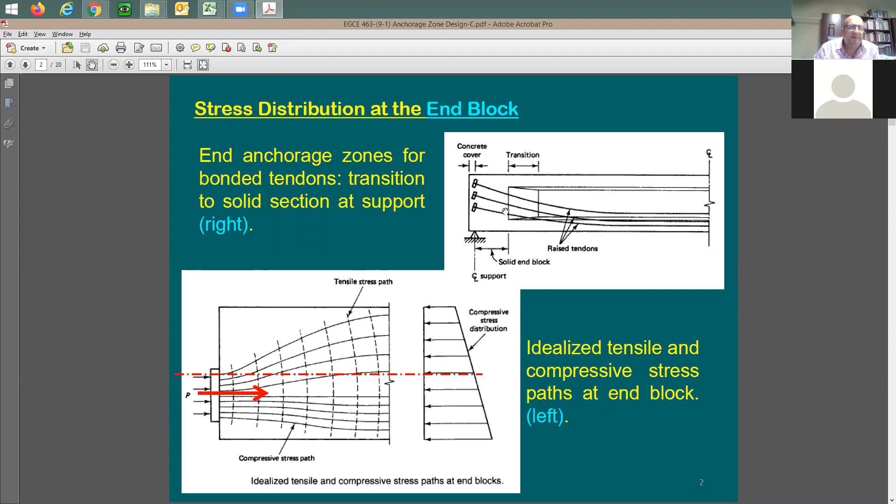Just speaking, here is a pre-stressed beam. It doesn't matter whether it's pre-tension or post-tension, but we have the cables, they're going to be draped, and at a certain point we're going to provide the anchorage right here. At this anchorage location, you're going to have some forces coming this way. So the force here is going to be compression on the concrete, while it's going to be tension on the strands themselves. The strands are exposed to tension, and this tension, once you put this anchor, is going to provide compression on the end block of the beam.

Now, this high compressive stress is going to cause some trouble here, because all of a sudden all the stresses are going to be at the end. This is where you transfer the force. Whether you have pre-tension or post-tension, transfer of the force is going to happen in this location, roughly in this area.

This is the reason you see this piece to be solid. See, this is solid here. And right here, if you cut the section, it's going to look like an I-beam. So here is going to look like an I section, and here's going to be a rectangular section. Why do we need this rectangular section? Because we have high compressive stresses at this place, and we need to provide some reinforcement to prevent cracks from happening at this location.

So if you look at what happens at just one bearing plate, you call this a bearing plate or the anchorage plate, you're going to put one big force. Most likely you'll have a few strands, but at the end we're going to put the resultant as one big force.

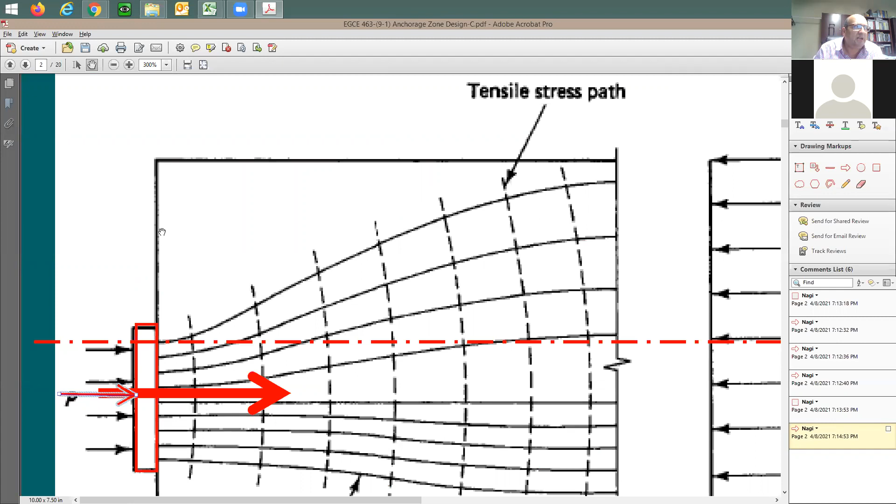Do you think you're going to have any stresses at this point? Any compressive stresses right at this point? Let me put it right here. If you put an axial force concentrated here only, actually in this area, you're not going to see any compression at all in this location.

This distribution is okay right here at this section if you put a big, rigid plate - a very stiff plate - and start to put the pressure. In this case, the stress distribution right below the plate is going to look like this. But if the force is concentrated at a certain location only, it's going to take some time before the stresses here get uniform, like in this shape. This is what we call the stress trajectories.

This shows how the stress is going to move from one point all the way to the end point. The stress is going to be uniform after a given section. Right here at this section, you see what happened to the compressive stresses - it's shown like solid lines. In this location, you have no axial compressive stresses at all. Same thing here, but after a certain distance, you're going to have this uniform distribution of stresses along the entire depth of the beam.

Meaning, if I'm going to be taking a section here, stress distribution is going to be only in this location. And here, no stresses at all, and here, no stresses. And you may have some tension in this location, you may have some tension in this location.

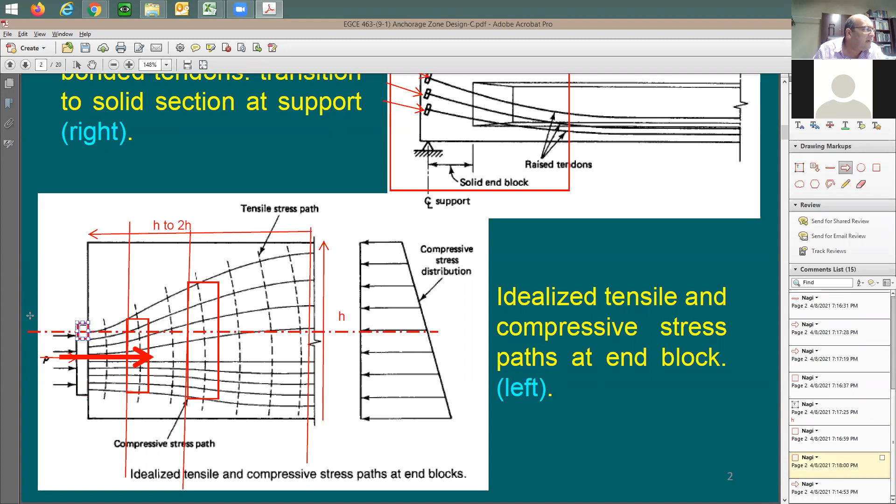But here, if I put, let's say, I'm going to divide this area into small areas, right? I'm going to make it like this. It's just going to be taking this little section. So I'm going to say I have one force applied here, as a resultant of this little segment that I have taken here.

So this force is coming here as compressive force. I'm going to say it's coming this way. It's going to be coming also this way, and like this, right, and then like this, as compression.

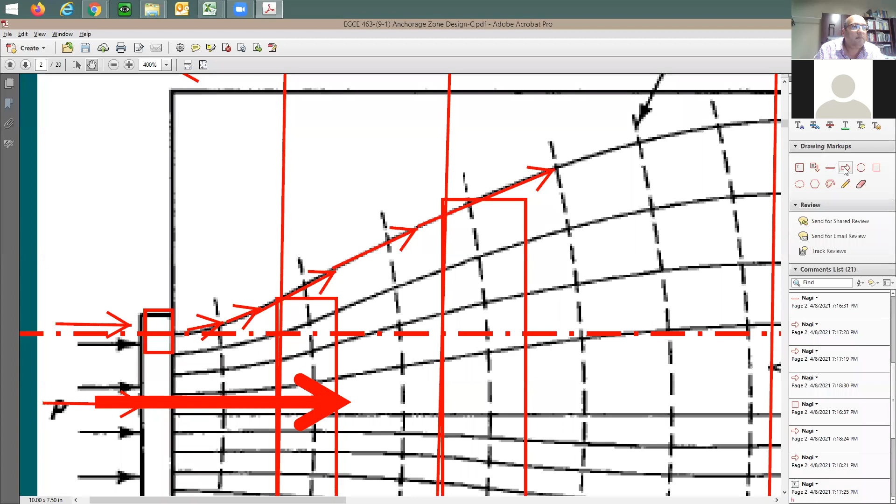At the end, a force is going to be coming that way, right, which is this compressive stresses. So if I give you these two forces here, I'm going to say if I have a component coming this way, another component is going to be completely horizontal.

Let's give you the consequence. What's going to happen in the vertical direction? Shouldn't you expect another force coming that way to balance this force? You say this force is pushing this way, and then you have this force resisting. So what's going to happen?

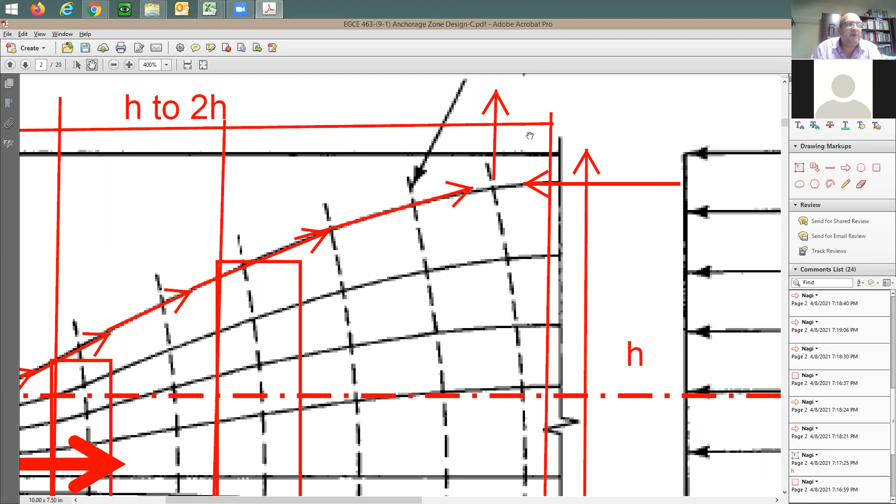There is a small component of this force that wants to go up, and this is going to be causing tension. So you should expect this tensile stresses throughout this dashed lines. So this dashed line here is going to represent tensile stresses.

Once the stress here becomes uniform as in compression in the x direction, you're good. You don't have any tensile stresses in the y direction. So this dashed line represents tensile stresses in the y direction. It's going to be like this, and on the bottom is going to be like this.

So here's the problem. Once you put some compressive force here, it wants to open up this block. Now, how would you resist it? What is the easiest way of resisting this?

You can say just add ties. So what I need to add is some ties in this direction here, right? This gives you like a tie, and here's another tie, like rebars. This gives you stirrups or ties, and this tie is going to be taking this tension force. But of course, you need to add some reinforcement here at the top and the bottom to anchor the ties through it.

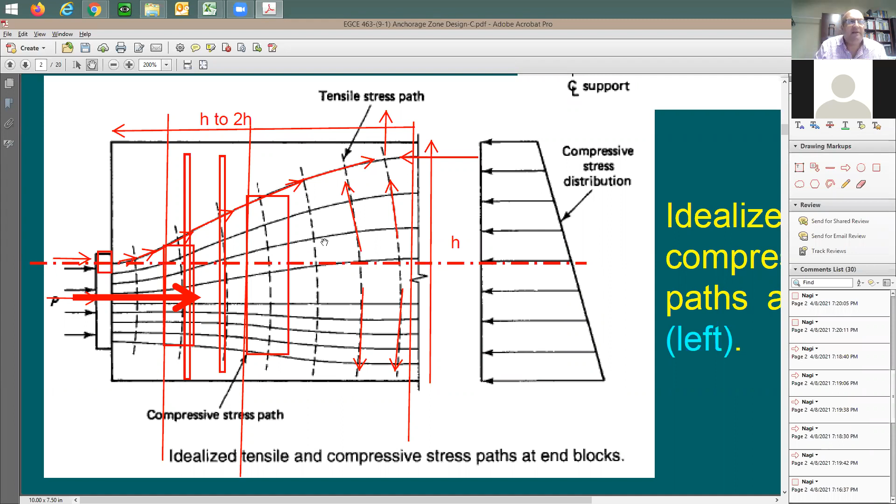It's going to be very similar to the shear design. We're going to provide some ties here to take this tension force. So this is kind of a general idea so that you guys know what we're talking about here, what's the importance of having this end block analysis, right? And as I said, we have two types of end blocks or anchor zones. We have one for the pre-tension, and another one for the post-tension.

Let's go through all of these notes to understand what's going on. It says here: concentration of compressive stresses occurs longitudinally at the supports of both pre-tension and post-tension. This is true, it happens in both cases. So whether you have pre-tension or post-tension, you're going to have some tensile stresses and some highly compressive stresses. It's going to get transferred from a local, smaller area to a bigger area, which means the entire beam depth.

For pre-tension beams, the stressing force gradually transfers to the surrounding concrete over a length of LT, your transfer length. Imagine this cable here is anchored, or bonded, to the concrete. Now, transfer of this pre-stressing force would need a certain length, and this length is called L sub T, transfer length. It is not necessarily equal to H or 2H, but we're going to see a way to determine this length. So over this distance, all the forces can get transferred from the strand to the concrete.

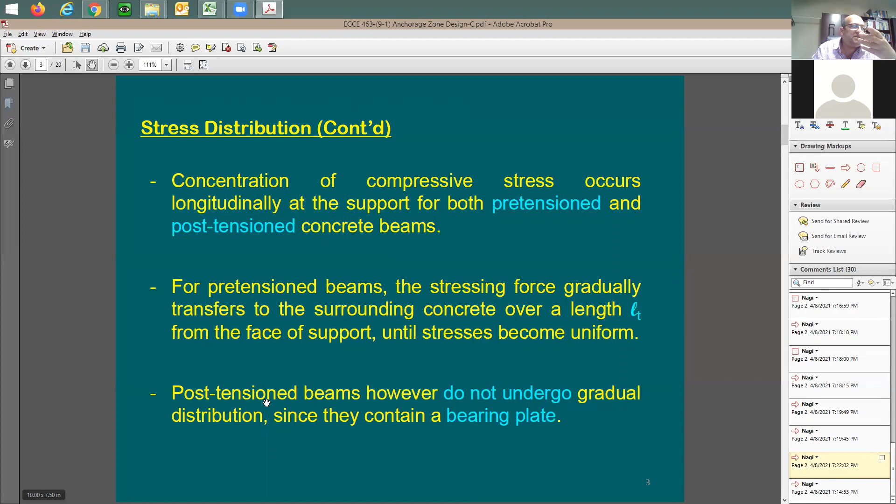But in post-tension, there is no bond in many cases between the strands and the concrete. The force is going to be like a point load applied at the end of this end block, just outside of it. This is a big difference between post-tension and pre-tension when it comes to end block design. So for pre-tension, you have the force transfer over L sub T, and in post-tension, you don't have this gradual distribution. Why? Because the entire plate is just loaded from outside.

So you don't have this transfer length. You have this transfer length when you have the pre-tension. But when you have the post-tension, this load is going to be applied from outside of the structure or beam, and the stress distribution is going to take a shape like this, but it's going to be all concentrated out of the beam itself.

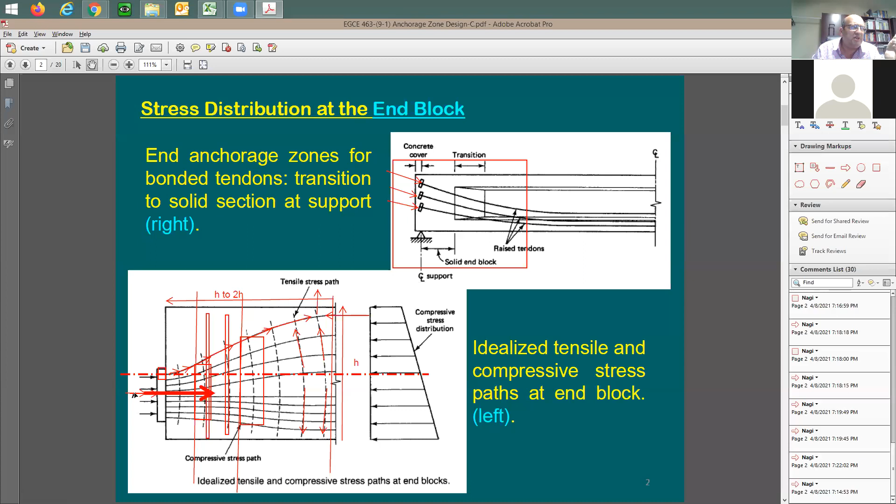Let me explain what happens. Here's what's going to happen: if you have highly compressive stresses applied right here, or right here, you're going to have some tensile stresses develop in the Y direction. So you're going to have some tension coming this way and some tension coming this way.

Once you go beyond the cracking stress, which is 7.5 square root of f prime c—let's call it the limit cracking stress—this section here is going to start to open. We call this a bursting crack.

So what you need to do is provide some ties. You're going to put some ties in this direction. I'm going to show a picture of the ties and how they look and their direction. This tie is going to keep this concrete area intact to prevent the cracks.

So the problem is, if you have any cracks here, the anchor is going to start to move in, which means this block, this anchor, if it starts to crack, it's going to start to move slightly in this direction. It's going to be a very small distance, maybe you cannot see it with your eyes. But the problem of moving this block in this direction means that you're losing the pre-stressing, and this is going to be part of the loss that happens to your pre-stressing force.

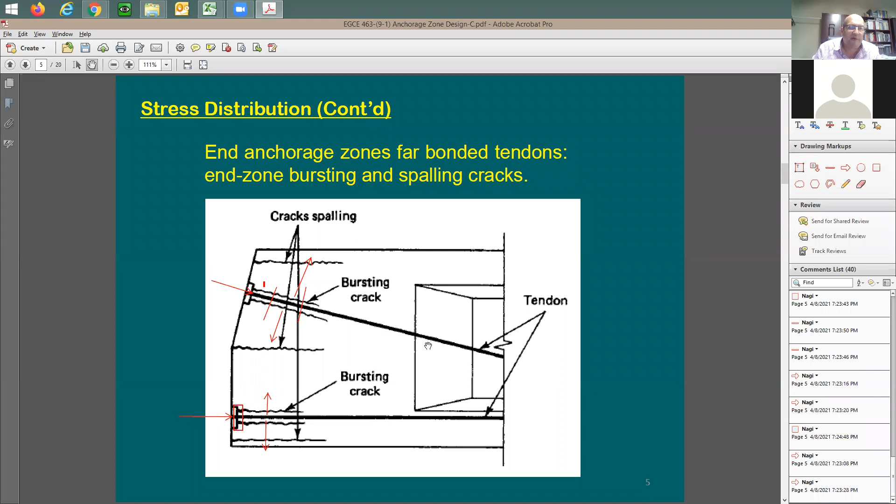I'm going to show you here a picture of the beam. So here's the beam. At this section it's going to be like an I-section, and usually at the end it's going to be like a rectangular section. But in this beam detail, you see that there is no rectangular section at the end—it's just kept like that. This is the way it was designed, so these two lines are just straight.

And look what happened—usually I would expect that this section here is going to be the I-section, and right here, most likely, is going to be this rectangular section, which means this section right here.

Look at the cable location. You're going to have high compressive stresses right here at this location, and you should expect some tensile stresses in the Y direction.

This is why we're going to provide lots of ties. At the beginning, we're going to have more ties because it's expected the stresses here will be a little bit higher than anywhere else. This location is also critical because if you have any relative movement, very small movement of this bearing block or bearing plate to the inside, it means you're going to see some losses in the pre-stressing. You don't want this to happen.

And here is tie design. It's going to look like this, like a vertical tie. And of course you need to anchor it, so I'm expecting that I'm going to have some rebars here. You cannot just leave it this way, right? This picture is just showing here the pre-stressing strands.

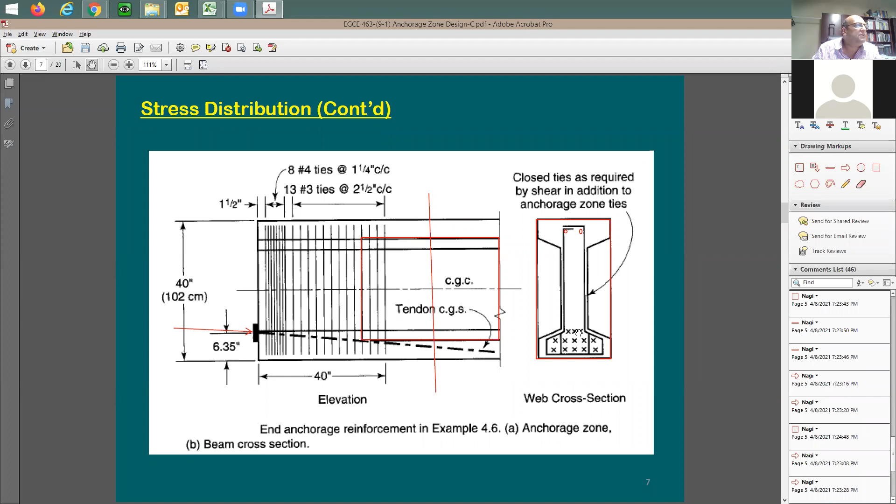Another detail for a bridge shows the strands and shows these ties. Look at the ties here. It's going to be like U-shaped ties and lots of reinforcement at the end of the block. And you see the end of block? If you look at the depth of this beam, you feel this looks like kind of a square section, right? Isn't it? The length is almost equal to the depth, which is very common.

This end block, they usually take it from 1 to 2 times the beam total depth. So this length is roughly 1 to 2 times the beam depth.

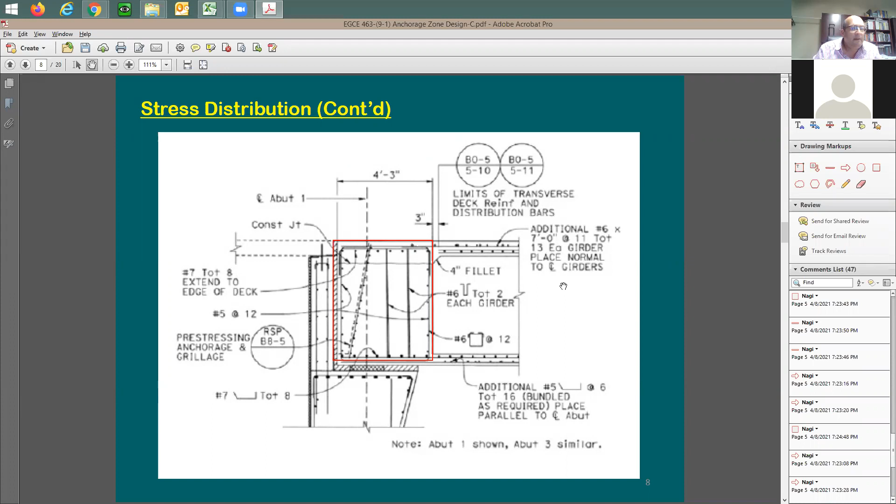All right, now let's look at what happens in pre-tension first. How about this transfer length? How do we calculate it out? We have a length called development length, L sub D, which is composed of two sections or two lengths. The first one is called transfer length. This is where you transfer the force, the initial force. And then after that, you have the flexure bond length. I'm going to explain the difference between the two.

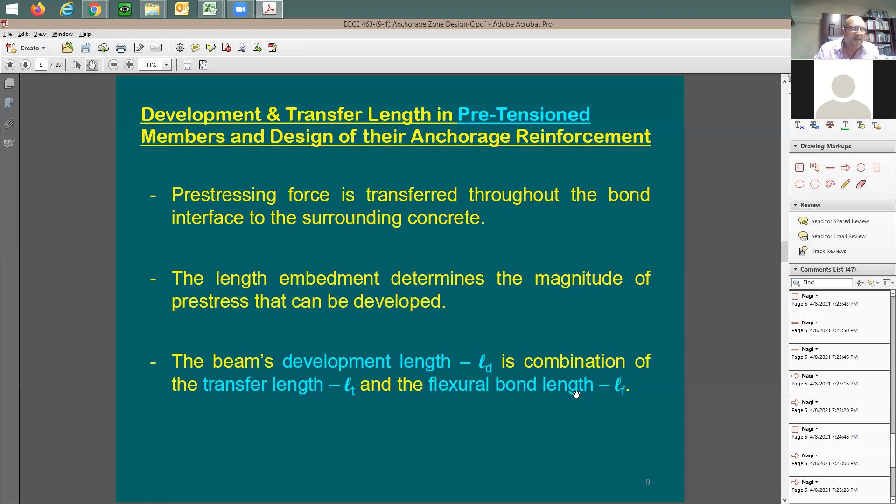So first you have the compressive force, which is going to be right here at this location. It's going to be somewhere here. Now we need to transfer the force. Which force? It's going to be the effective force. Don't forget that you have the effective force, you have the initial force, FPI, and then you have FPE, and then FPS. FPS is the one you need to use in your design when it comes to flexure strength, like capacity, the bending moment. FPE is the effective one you need to use when it comes to checks on the stresses within the beam.

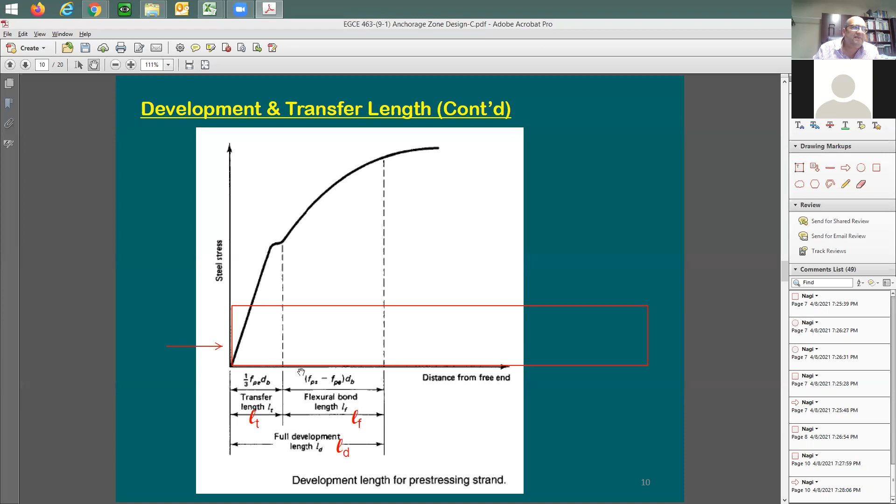So first you're going to have this length here, and look at the stress. Imagine here that you have a cable running this way, and then you have a plate right here, the anchorage plate. In pre-tension, you don't really have any anchor plates, right? So in pre-tension, you're going to have a direct connection between the cable and the concrete itself. So I can remove this because it's not really needed in pre-tension, and I can make this short because what happens is they trim the cable, cutting it to be exactly this length. From here to here there's going to be some transfer of the force to FPE.

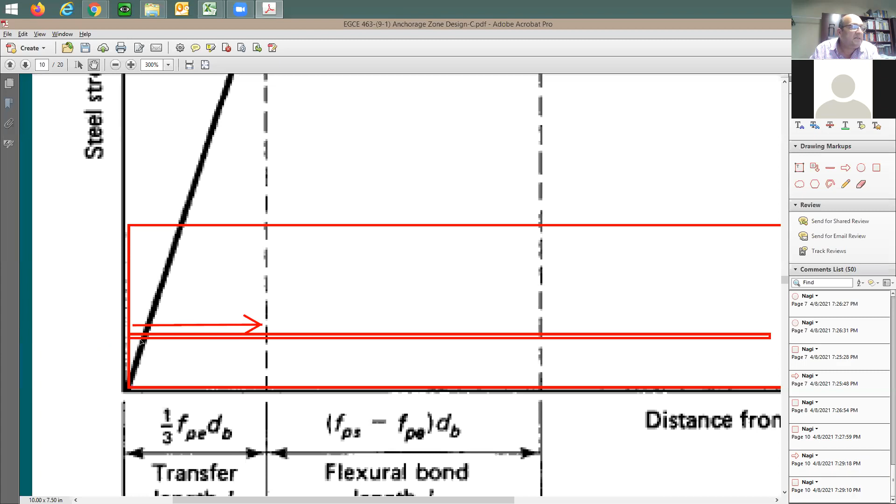Now, at the beginning here, you don't have any stresses in the steel itself. If you cut the section right here, the stress is going to be equal to 0. The stress is going to increase gradually because now you have anchorage between the strand and the concrete, starting from the 0 point all the way to FPE. So look at the stress, this is going to be the stress distribution. This value here is equal to FPE, I'm going to put it right here. This is going to be the level FPE, right here at this point. Now, this section here, it is true that it's exposed to the compressive force.

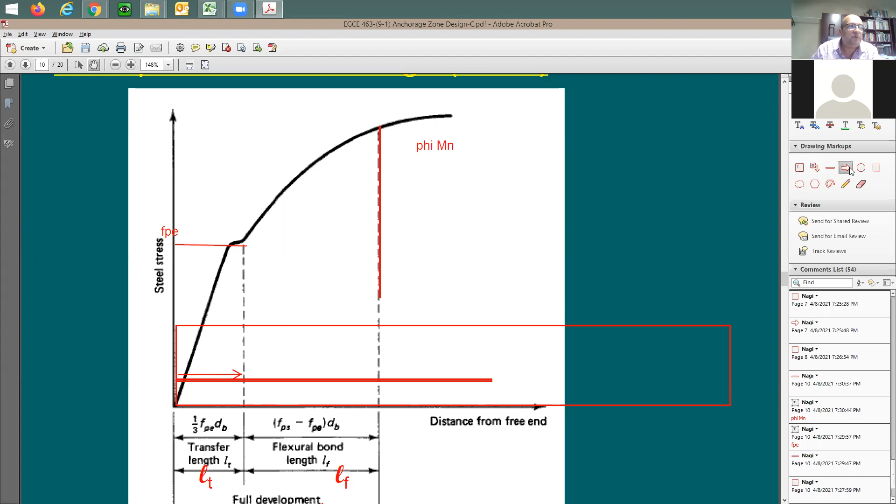Coming from the strain, but when you look at the moment diagram, it's not really pushing it to the phi Mn value, so M sub U here is going to be much less than phi Mn. Here it's going to be coming close to phi Mn. And this point is going to be right at phi Mn, which means this is the point of maximum moment. At this point, the moment is at phi Mn, which means this point, and the stress level in this location is going to be equal to FPS. So the stress here is FPS. This is the one you use in your design.

This is why they call this the transfer length. This is where you transfer the force FPE from the zero point all the way to the FPE value. From here to here is the distance called the flexure bond length, taking it from FPE all the way to FPS. We have some empirical formulas for it: it's 1/3 FPE times dB, the bar diameter, and here's FPS, the difference between the stresses, FPS subtracting FPE times dB. This is the flexure bond length.

Total length is called L sub D. So L sub D, the development length, is equal to the summation of L sub T and LF.

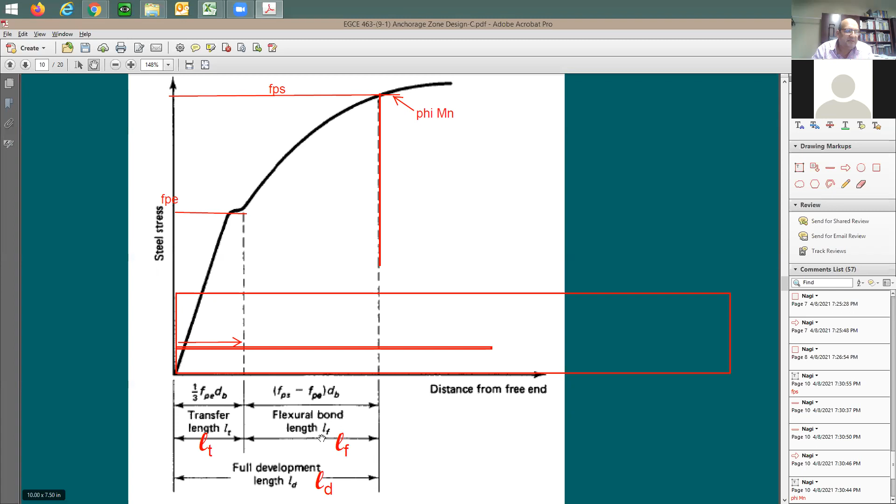So we have this empirical equation for the pretension, L sub T and L sub F. L sub T is FPE divided by 3 times dB. This is the exact equation, but in this case divide by 1,000, because this is in PSI. If you use this in PSI, you need to divide by 1,000 just to make the equation uniform. This is an empirical formula, so you cannot really justify it - you cannot say how much is the bond stress between the strand and the concrete and try to derive it. You can't do it this way. This is based on testing, so you just use the equation as given. LT is equal to FPE in PSI times the bar diameter, the strand diameter, say 1/2 inch or 0.6 inches, divided by 3,000.

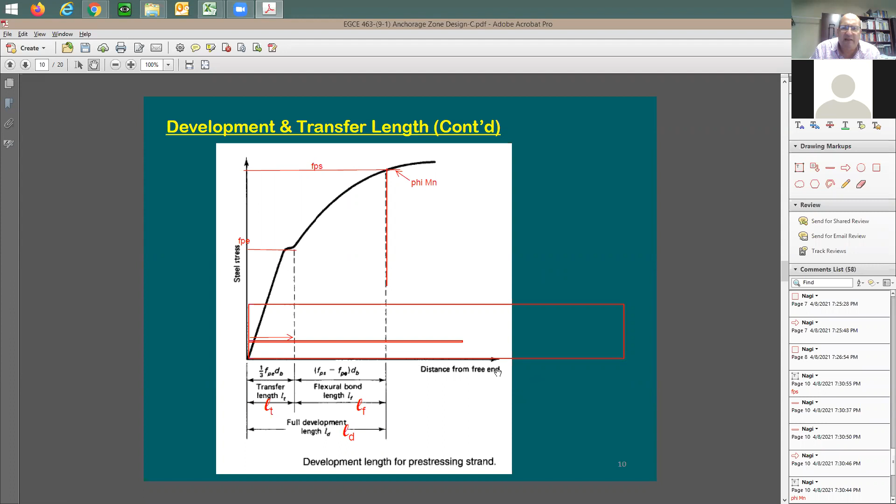For the flexure development length, it's equal to 1 divided by 1,000 to put it in KSI, times FPS minus FPE, the difference between the two levels, divided by 1,000 to put it in KSI, and then multiply by dB. It's going to be that simple. So you have a couple of equations here to figure out LT and LF, and just add them to figure out the full development length for the pretension beam.

Here's the total length, L sub D. You just add the two to each other, so it's going to be FPS subtracting 2/3. Why subtracting 2/3? Think about it - you just do the math.

Now, how do we design for the end zone, for the block, the end block? At the end, we're going to use the Caltrans method. Caltrans method is taken from AASHTO. Caltrans is the California Department of Transportation. They have their own design specifications for beams and girders for all bridges, and they have a very simple method you can use.

It says here we have an empirical equation to find out the stirrup force, meaning the stresses and forces in the y direction, the tensile stresses. It's maybe about roughly 1% of PI, the initial pre-stress, times the height of the section, divided by L sub T. So where do you get the L sub T from? You get it from here.

Just keep this in mind: it's FPE over 3,000 dB. So after you figure this out, L sub T, you come here to this equation and figure out the amount of force expected in the y direction. This is going to be a tension force.

And then, if you like to average the stresses within the stirrups and the ties, and also if you like to keep the stress in the tie kind of low, you don't want it at 60 KSI at the yield point. Because at the yield point, it means you have enough strain in the tie, and if you have enough strain in the tie, the tie is going to start to open up. If the tie is opening up, some slippage is going to happen for the strand itself, and if you have any slippage in the strand, it means you have losses - more losses in the pre-stressing force. You don't want this to happen. So we control it and keep it up to 20,000 psi instead of 60,000 psi in the tie itself.

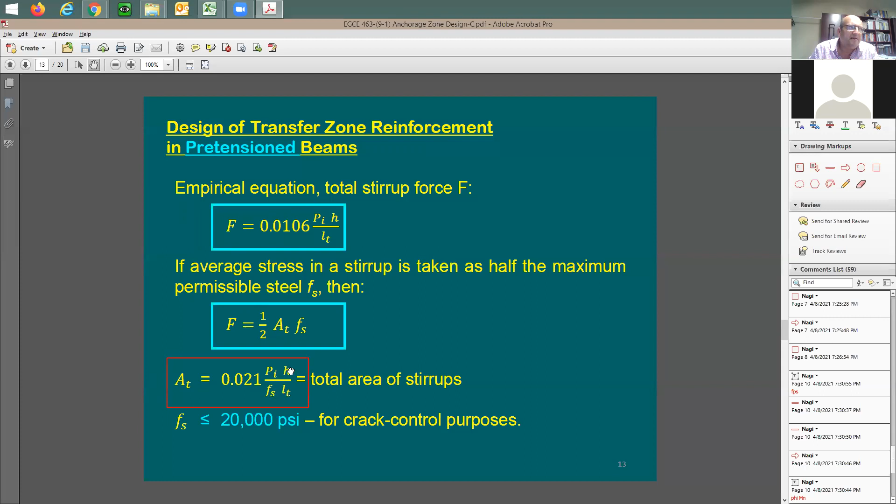If you look here at this equation, this combination of the two equations that we have looked at - here's one equation, F is going to be equal to 1% of PI times H divided by L sub T. And if you want to find out this AT, you're going to say AT is equal to the force, which is this equation here, times 2 divided by Fs, which means this equation. So this equation here is going to give you the total amount of cross-section area of the ties or the stirrups based on PI, the height, Fs, the 20 KSI, and the length of transfer.

This is exactly what we have used here in this equation. We have used the previous equation I just showed you. Based on this equation here, you need 0.6 square inches roughly for cross-section area of the ties.

If you try here to use, let's say here's a beam, and then you decide here to use number 3. When you cut through number 3, the force - if you cut through number 3, it means that you're going to have 2 times 0.11 square inches for each one of this stirrup leg. You're going to have 0.22 square inches.

Now you need 0.61, which means that you need 3 ties. So we're going to provide here 3 ties next to each other, and this should be able to resist the tension force.

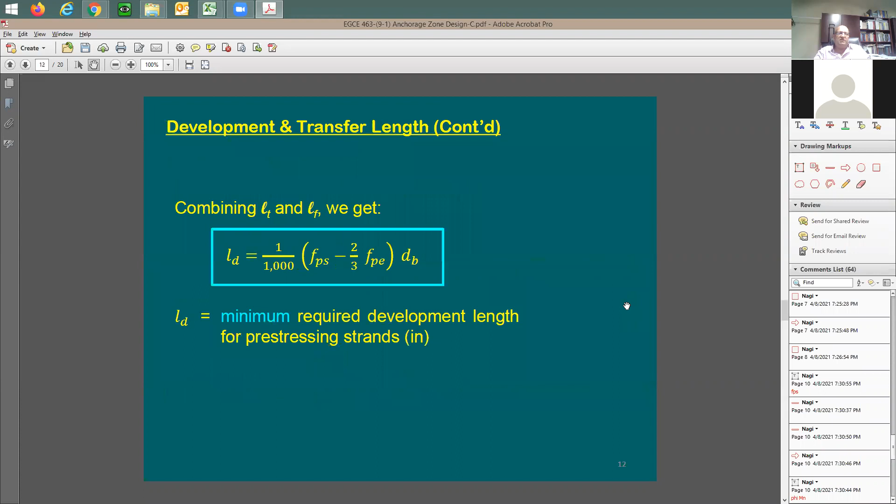I have here a quick question that came through from Teresa. She's asking about the total length and units. So as I said, this empirical formula - you cannot really justify it like this, for example. How would you justify this? It's just an empirical formula, so you cannot really do your units with it.

And also, as it says here, if you want to use it in this equation, it needs to be in PSI. So it is just like that. It's an empirical formula, which means based on testing. So they do some testing, and then they do a comparison here, or relationship between FPE and FPS and dB and the length, and then after that they come up with this equation. This is why they call it an empirical formula.

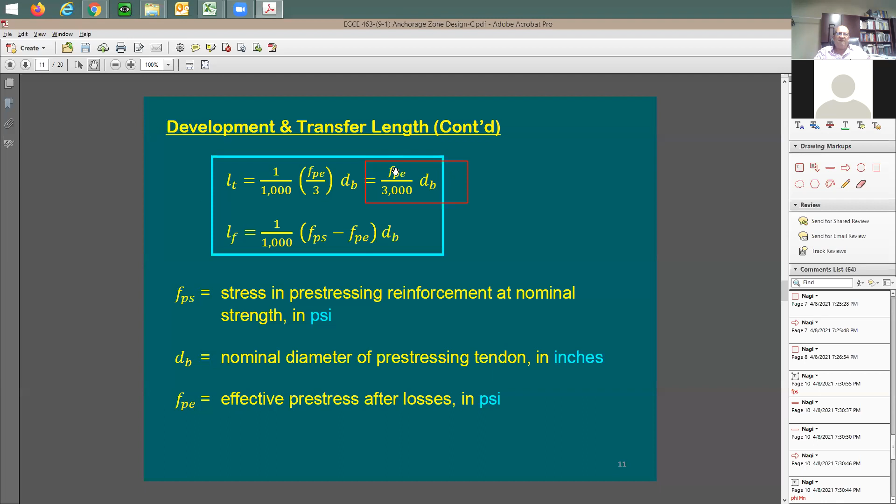So, just look at the axial force. Don't worry about the transfer length. Just take the transfer force here, PI, take 4% of it and consider it to be acting vertically. This means this is going to be the tension force, this PR is going to be the tension force. Tension force in the y direction is going to be equal to 4% of the axial force.

You say okay good, so what do you do after that? They just say design the ties to take this, but be sure that the stress within the tie is not going to go beyond 20 KSI. So, it's much easier.

Now let me go back here to my example and see how would I relate this to the Caltrans design specifications. Let me take here this 376 kips. Take 4% of this. What does it mean by that? Can someone help me with this? 4% of this force, how much?

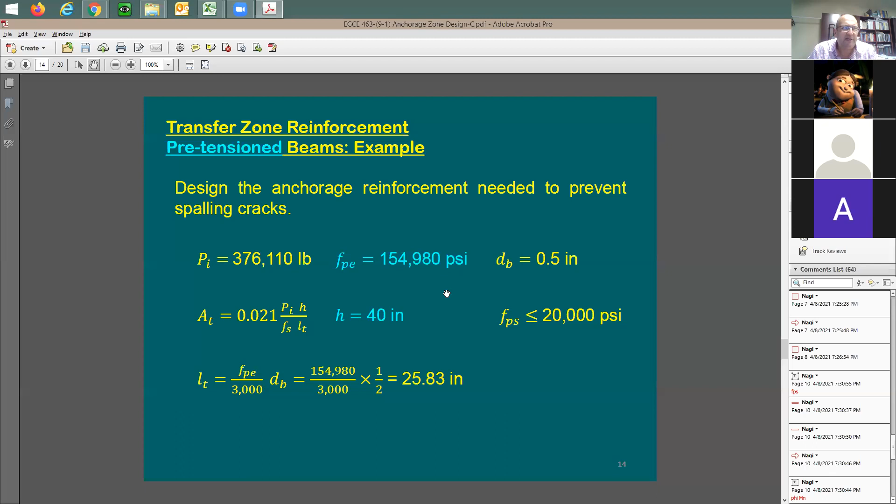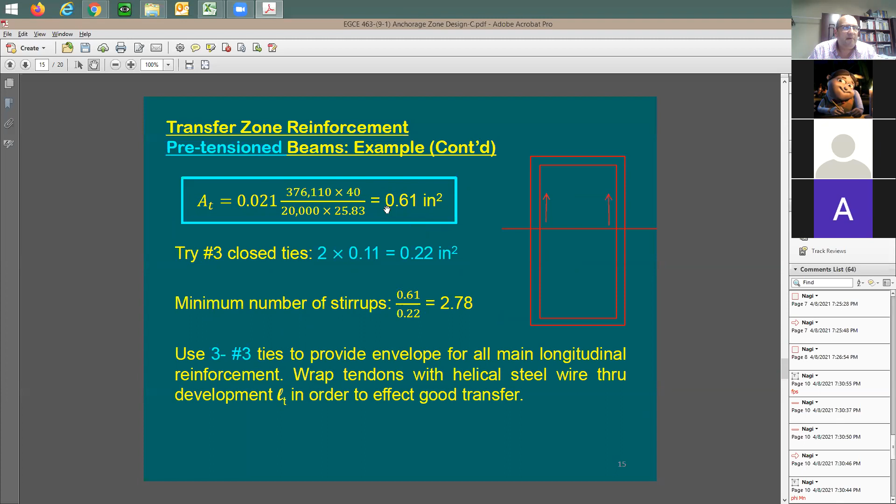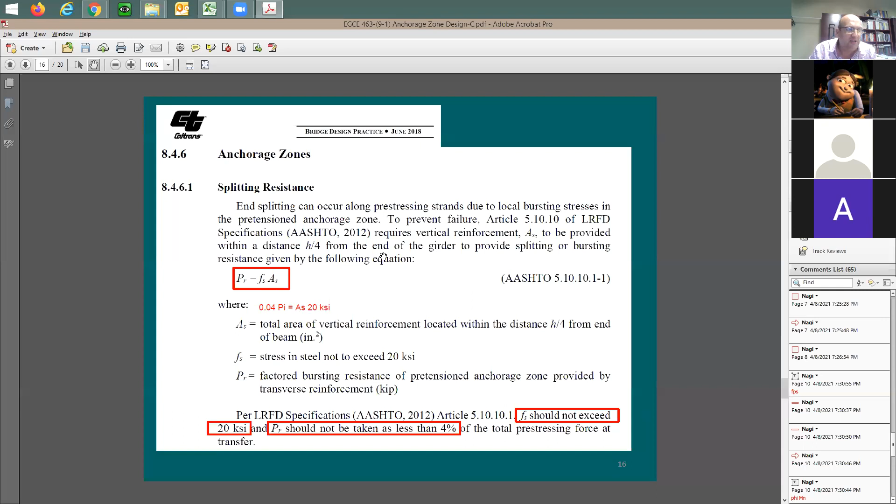Make sense? So what's the 20 KSI? It's gonna be FS, and this is gonna be AS for the tie itself. And what is PR? It's gonna be 4% of PI. So I don't need here a transfer length, I don't need anything. So the equation is gonna be so simple. For pre-tension, all what you need to do is take 4% of the axial compressive force, the pre-stressing force, and just provide reinforcement to take this tension force. It's gonna be much easier.

Any questions? Yes? No questions?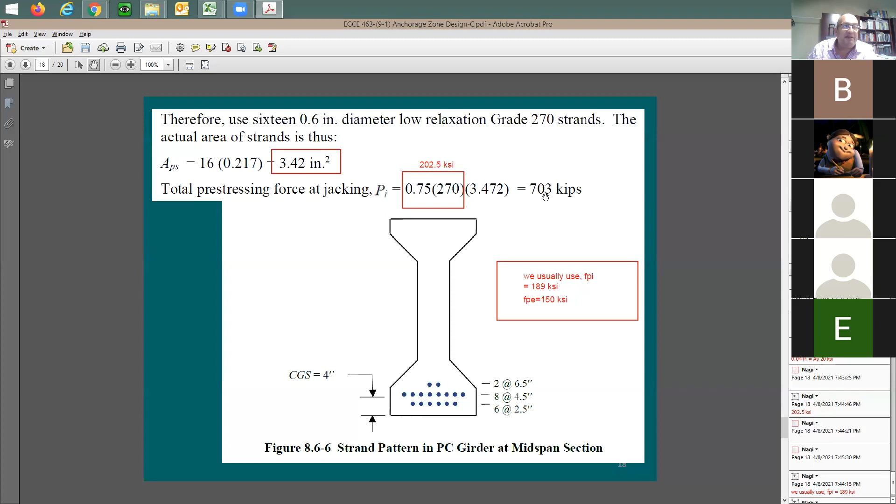According to Caltrans design specifications, I'm going to be taking 4% of this number. So now we're going to be taking 4% of the 703 kips. Now let's see what's gonna happen. Here is 4% of the 703 kips. You're gonna end up with 28 kips or 28.1 kips for the PR.

So what does it mean by PR? If this is gonna be your beam, and this is gonna be like the end block, this is gonna be the force, this is gonna be pulling this stirrups up. So we're gonna say this is gonna be FPR, so we're gonna write it next to it.

PR is going to be this force here, 28.1 kips. You would like to keep the stresses within the steel to be 20 KSI max. If you take AS multiplied by the stress, it gives you the force. Therefore, AS is going to equal 28.1 kips divided by 20 KSI, ending up with 1.41 square inches needed for all the stirrups.

Not just for one stirrup, this is for all the stirrups. Now how would I put the stirrups? Here's the beam again. The stirrups are going to be like this, a few of them, not just one. A few stirrups. At each one of them, you're going to be cutting 2 legs of the stirrup.

If I'm planning to use number 5 bars with 2 vertical legs, because it's going to be a stirrup or a tie, it means for each stirrup or each tie, I'm going to have a total of 0.62 square inches. What is 0.31? That's AB for number 5 times 2. Why times 2? Because I have 2 legs. Here's the total square inches needed for this end zone.

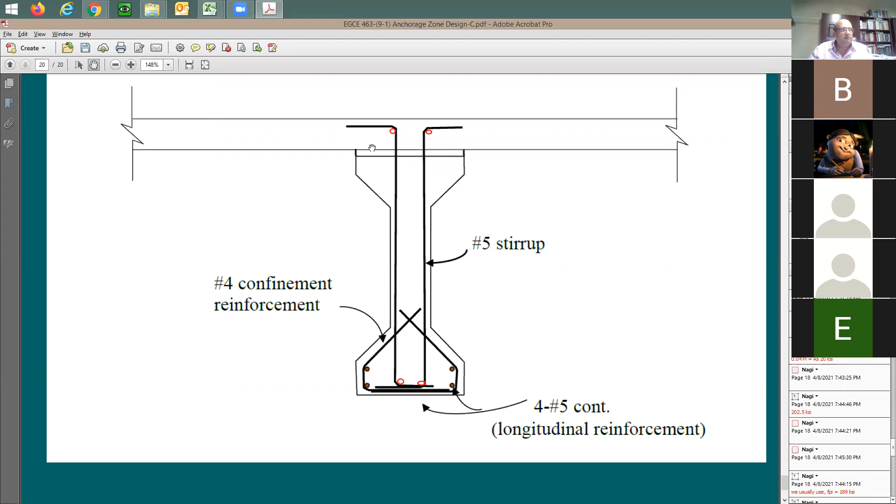On this design methodology? So simple. Where... yes, go ahead, please. Where do the number 5 rebars come from? Oh, that was just previously given, right?

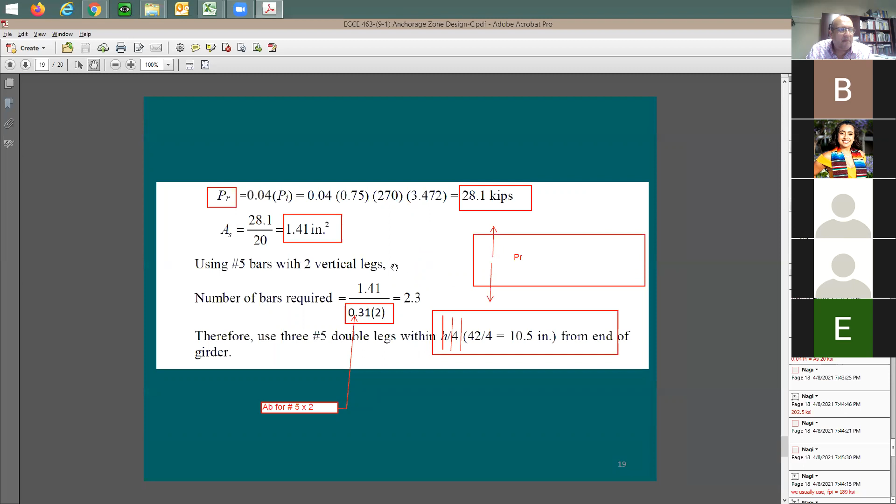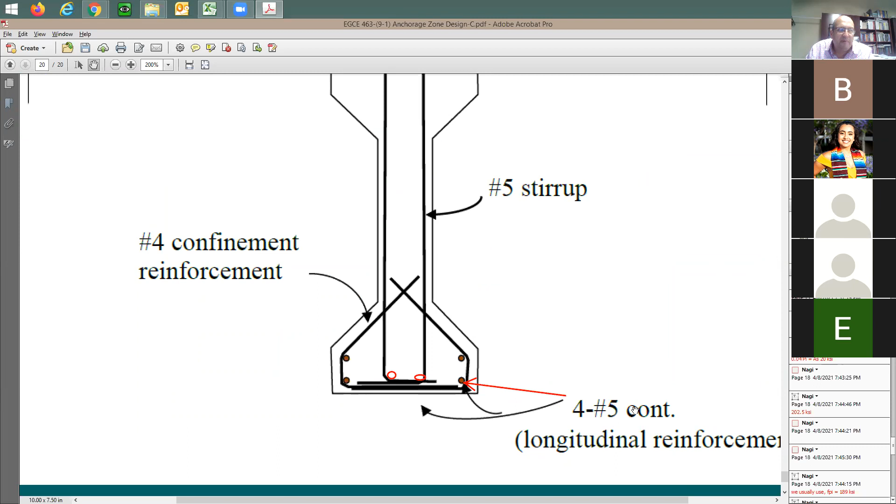Here, we said that we're going to be using number 5 bars, right? Oh, it says 4 on the drawing. I don't know, that's different. We're here. The 4 number 5, this gave me this continuous. He's pointing at this bar. 1, 2, 3, 4. Okay, with number 5, continuous reinforcement. This is a different issue, I'm talking about...

Here, the vertical rebars, the stirrups, like in here, in this section. If you'd like to consider this to be the beam section, right? These few lines that I've just drawn here, right? This gives you the 3 ties that we're talking about. And as it says here, therefore use 3 number 5, double legs.

Within h/4, so you're going to put it here. You see the spacing? It's going to be very small. You're going to put the 3 within 10.5 inches, which means the spacing is going to be about 5 inches between each tie. In reality, I'd add maybe 5 to 6 and put them at 4-inch spacing.

Okay, thank you, all right, thank you. Any other questions on this design methodology? So simple. You take 4% of the compressive force, the pre-stressing force, and put some ties to take this force based on 20 KSI max. That's it.